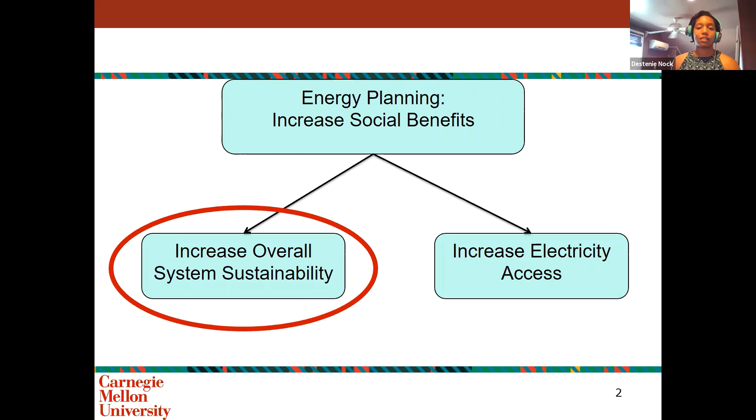So in the first part of this talk, we're going to be focused on increasing overall system sustainability. And this is really going to focus on the New England power system. That's where I started my research in power systems. And so if you have no idea where New England is, it's in the upper northeast quadrant of the United States. And it's made up of Maine, Vermont, Connecticut, New Hampshire, Massachusetts, Rhode Island, and yeah, that's all of them.

And they have a lot of energy questions that they are going through. So they were retiring about 5.5 gigawatts of coal and oil capacity, and 3.3 gigawatts of nuclear was at risk for retirement. So the main question that we were asking in this analysis was, which combination of power plants is going to be the most sustainable in terms of reaching their goals?

So if I asked you, what's more sustainable, coal or wind? A lot of people would just respond immediately with wind. And the same thing goes for natural gas versus solar. Often in the audience, a lot of people will respond with solar.

But if I was to ask you, what's more sustainable, a grid that's 50% natural gas and 50% wind versus a grid that's 50% natural gas and 50% solar, there would be more difficulty in understanding that. You need to understand your definition of sustainability, and you also need to understand your resources and how much energy each generator will contribute. So that makes a great motivation for a sustainability model.

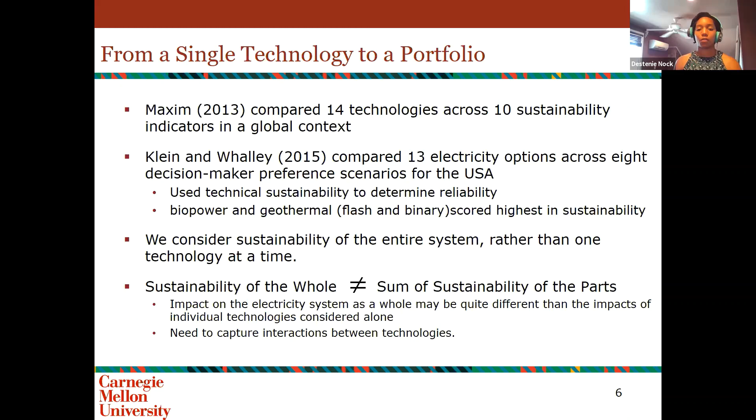But one of the downfalls of these analyses is that no single technology will ever be used to run the entire power system due to security concerns and resource availability concerns. So the main thought behind this was that the sustainability of the whole power system is not necessarily equal to the sum of the sustainability of the parts.

So to answer this research question, we based our analysis on the resource adequacy problem: ensuring that enough generation capacity satisfies demand, given the large-scale commercial technologies in the New England sector at the utility scale. New England is really dominated by natural gas. It's about 44% of their grid. They have a lot of hydro and nuclear plants.

Wind and solar farms are becoming largely deployed, especially with offshore wind technology making its way into the US market. And then the peaks are satisfied with oil plants that often come online in the winter when the natural gas is largely being used by the heating sector.

So in our initial analysis, we abstracted from transmission constraints, which means that this is going to be a lower bound on generation capacity needs in the New England region because we are not going to account for things like congestion, for example. So we're leaving that for future work.

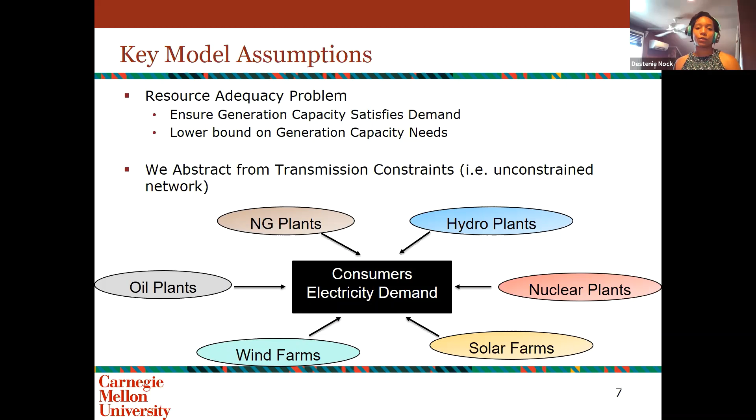So looking at the methodology we're using in this paper, the blue boxes are where we're defining the portfolios. First we start with gathering data on the hourly demand and wind speed information across the New England region, as well as solar radiation data and nuclear outage information. We input our initial generation capacity levels. We feed this information into an electricity model.

Then once we run the electricity model, which I'll explain more on the next slide, we determine if that generation portfolio is reliable, meaning can it meet the demand that we have set based on historical demand constraints for every hour over a 5-year time period. If it's not deemed reliable, we have to add capacity and then rerun it through our electricity model until we reach a reliable portfolio.

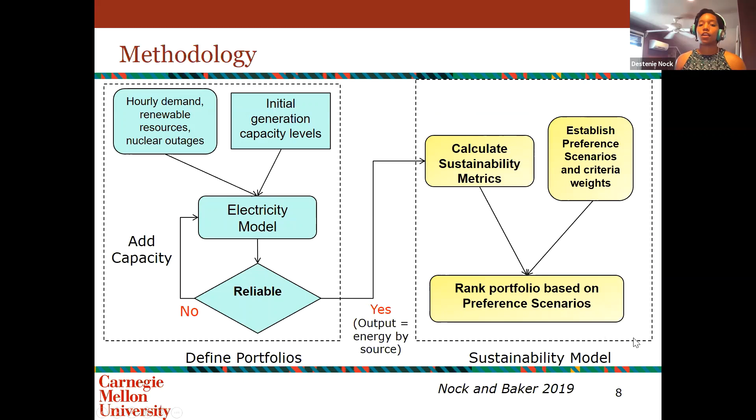And once we reach a reliable portfolio, we output the energy by source, and that feeds into our sustainability metric calculation. We have established preference scenarios, taken from the literature to represent our different decision makers, and then we rank those portfolios based on the different preference scenarios. So the blue boxes are where we're defining our portfolios, or the mixes of energy technologies, and the yellow is where we are actually evaluating the sustainability of these different portfolios.

So this is our electricity model. It's a merit order dispatch model based on historical prices in the New England region. We start at time t with our hourly demand, abbreviated HD. And we dispatch nuclear, because often it's negative in the New England region. We then dispatch solar and onshore wind, followed by offshore wind. If there's still hourly demand left, we'll split between natural gas and hydro.

And then we have to check if the pipeline is maxed out. In the New England region, natural gas has to go to the heating sector first. So if the pipeline is maxed out, then we believe that we are in winter due to the heating demand constraints, and we'll dispatch oil followed by hydro, due to needing to keep the river level higher so that we don't have a large amount of fish impacts. If the pipeline's not maxed out, we'll dispatch hydro first, followed by natural gas, followed by oil.

And if after we run through all of our technologies in the model we still have hourly demand left, then we say that we need capacity and that portfolio is not able to be tested any further in our study. And if we don't have any hourly demand left, we keep running this portfolio through our 5-year simulation for every hour of the year.

So, Destenie, it looks like you have a question. Okay, I can't see any questions, by the way. I will read it for you. Why are nuclear and onshore wind dispatched first? I think that's a good question there.

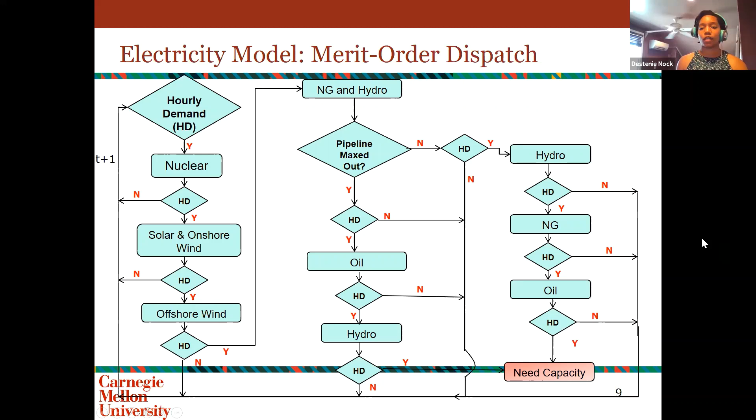Thank you. So there's some policy decisions that have been made in the New England area to help prioritize where they want the energy. Yeah, so right now solar and onshore wind are low enough that they are seen as a negative load or a must take in the New England region. So if they were actually competing in the competitive market, then we would need to capture how the prices would change over time. Thank you.

Okay. So the outputs from the model can be seen here. In the solid bars, we have our capacity in gigawatts, and the fuzzy bars would be the output of the dispatch simulation model, showing energy contribution by percentage. Green represents offshore wind, yellow is solar, the purple at the bottom is really small because most of the onshore wind in the New England region is in Maine, but not in Massachusetts, for example. The blue is hydro, the gray is oil, and the red is nuclear.

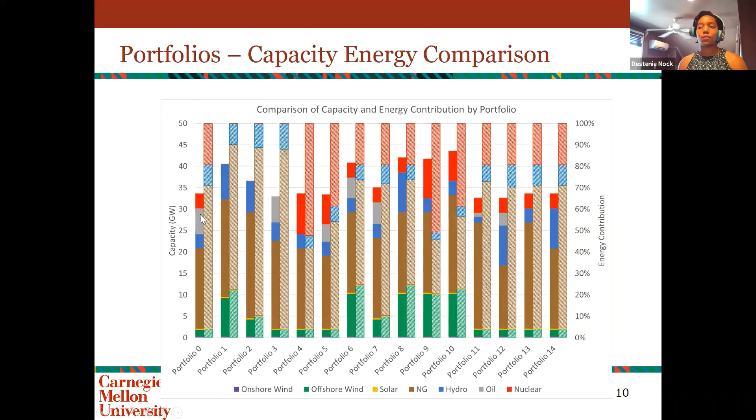So some of the things that we were focusing on with these portfolios is what's the role of nuclear in terms of sustainability. In portfolios 1 through 3, we have completely eliminated nuclear. In portfolios 4 and 5, we have assumed that maybe in the future nuclear would become favorable again in the New England region. We also have a lot of portfolios where we've kept the base level of nuclear, assuming that they keep their current capacity and don't make too many changes.

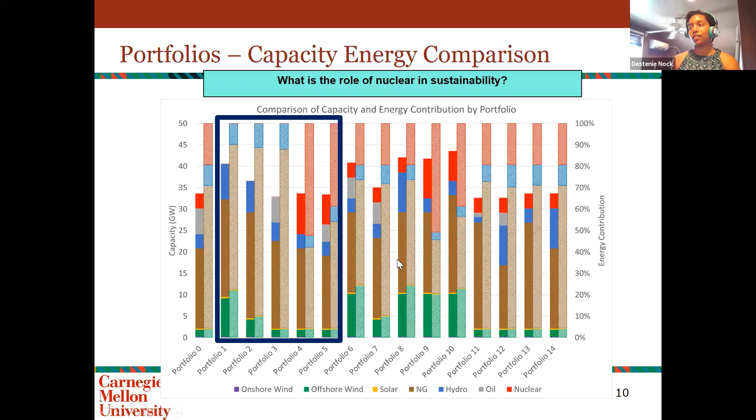We also asked the question of which generation should we use to support high offshore wind penetration. You can see in portfolios 6 through 10, we have really high levels of offshore wind in the New England region, about 10,000 megawatts. And we have been supporting that with different mixes of natural gas, hydro, and oil capacity.

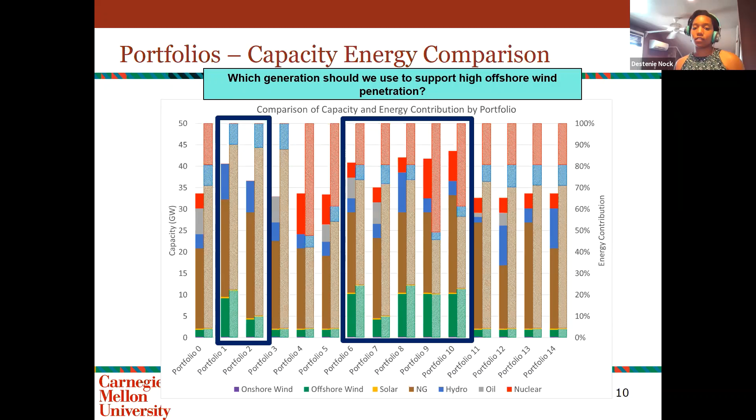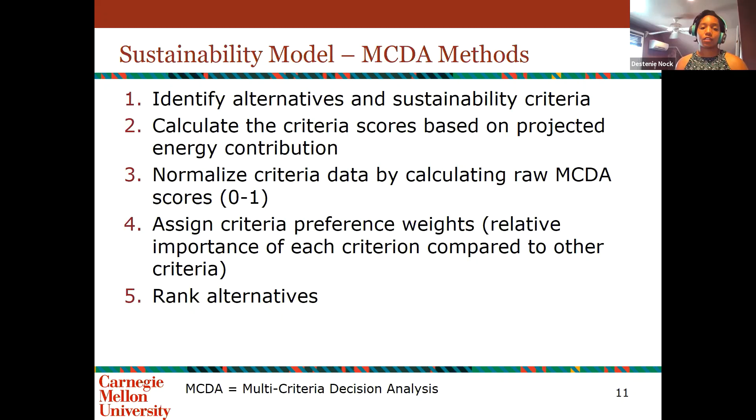Our sustainability model is based on the multi-criteria decision analysis framework, or MCDA. Step 1 is to identify different alternatives, which would be the different portfolios in our analysis, and also to identify sustainability criteria, which I will tell you on the next slide. Then in step 2, we calculate the criteria scores based on the projected energy contribution from our energy model. We normalize those scores between 0 and 1, with 1 being the best and 0 being the worst, so we can compare across different criteria. We'll assign criteria preference weights, which indicate the relative weight of importance of each criterion compared to the others. And then in step 5, we rank the alternatives.

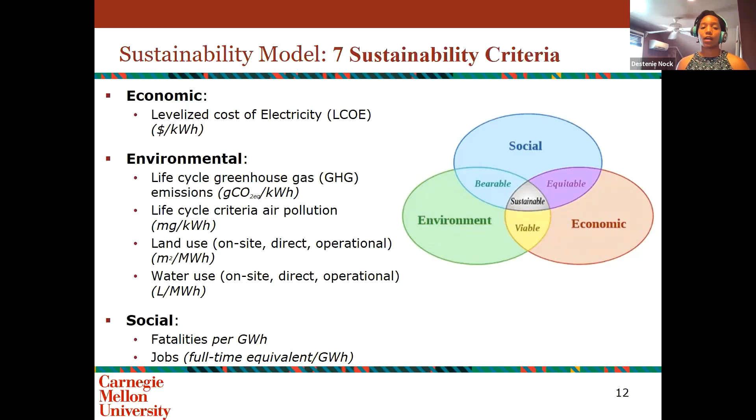In the sustainability model, we considered 7 sustainability criteria. The first is economic, with the levelized cost of electricity. We also included environmental concerns like life cycle greenhouse gas emissions, life cycle air pollutants, land use, and water use. And on the social side, we included expected fatalities per gigawatt hour, and jobs as full-time equivalent per gigawatt hour.

When determining the portfolio scores, we acknowledge that each power plant will have a fixed impact for sustainability and a variable impact. By fixed impact, I mean the emissions that just come from building the power plant. For example, with an oil or natural gas plant, there's a lot of concrete involved, which is very CO2 intensive over its lifetime. You also have CO2 emissions from drilling to get the oil, which would be more on the variable side. The variable side is any emissions that come from operating those power plants.

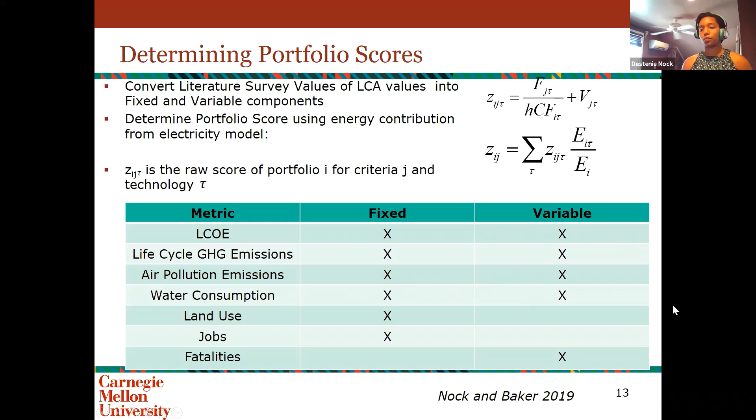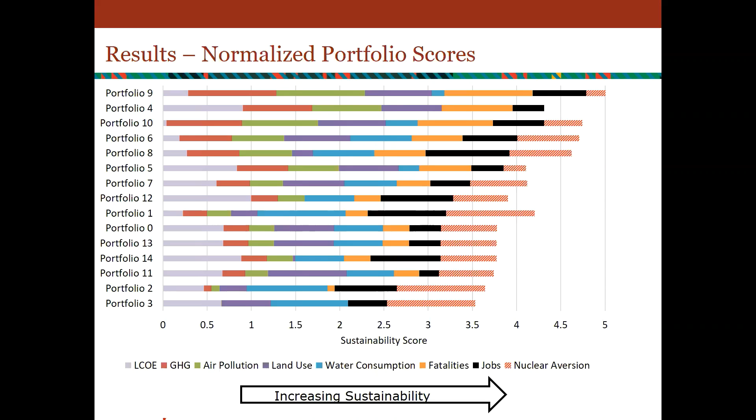Oh, I see a raised hand that's flashing on my screen. I think I can ask her to unmute and she can ask a question. Nina. Hi. Yeah, I was wondering if the goal is to have a low sustainability... The goal is what? Hard to hear you, Nina. Lower sustainability score. I'm just kind of confused because I would think you would want these bars to be lower, right? Or maybe I'm misinterpreting the graphic.

Right, so a longer bar is more sustainability. So for LCOE, lower is better. So it's the inverse of the bar. So if it has a sustainability score of 1, that means that it was the lowest cost portfolio in our analysis. And if you have portfolio 3... Great, thank you. You're ranking it in terms of right here. So portfolio 3 would be the quote unquote best.

Yeah, so actually it's portfolio 12 because it jumps right up to 1, right? So it has a score of 1, meaning that it's the best portfolio in terms of cost for our entire analysis, and that means that this is going to have the lowest cost. Portfolio 10 has the lowest bar, meaning that it has the highest cost. So it's inversely proportional. The only one that's directly proportional would be jobs, because more is better, right? So 1 for jobs means that it has the most jobs, and a 0 for jobs means that it has the least jobs.

So with this graphic, we noticed some trends. We see that portfolios 6 through 10 are all the high offshore wind portfolios, and those are all in the upper quadrant of our bar chart. And portfolio 4, the number 2 portfolio when you don't include nuclear aversion, is our high nuclear portfolio case. It scores well because of the low greenhouse gas emissions and low air pollutant emissions from nuclear. Also, nuclear has a very high energy density, so you can get more production out of it for less land use compared to other technologies.

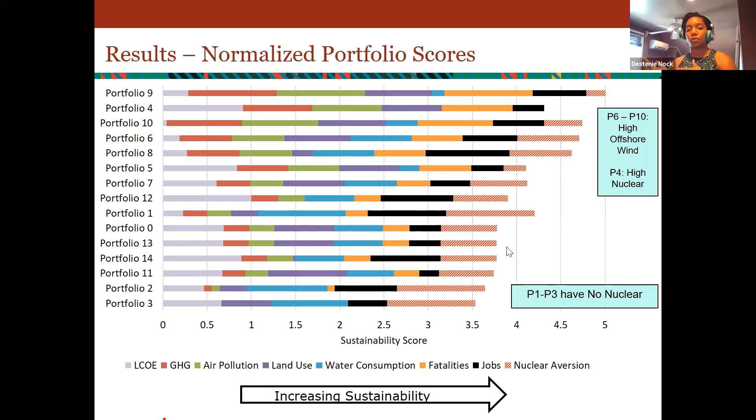And then if we include nuclear aversion, the only portfolio that we found to outrank portfolio 9... So the difference between portfolio 6 and portfolio 9 is that 9 has a higher amount of nuclear. It's kept on its base capacity and added a couple of nuclear power plants. So the only time portfolio 6 outranks portfolio 9 is when the nuclear capital cost exceeds $7,680 per kilowatt, or the natural gas air pollution emissions fall below 505 milligrams per kilowatt hour. So if, for example, they had some carbon capture technology attached to these natural gas plants, then portfolio 6 would continue to rise in the ranking.

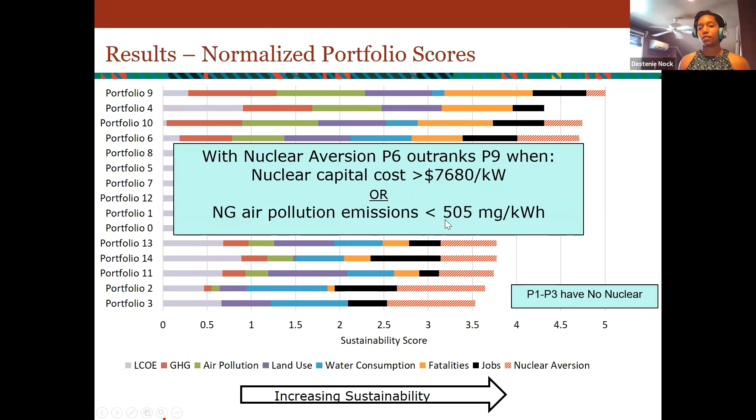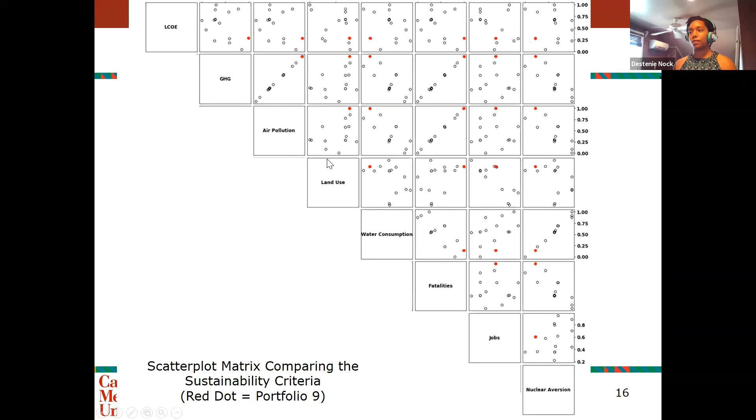The way that you read this is you look at the intersection. So if you wanted to know how the portfolio is ranked when you only considered air pollution and land use, you would go to the intersection of these two and you would look at this box. Same thing for air pollution and water consumption. And then you would look at the intersecting box there. The red highlighted boxes indicate a strong positive correlation between our metrics, which indicates that we could actually reduce the number of criteria that we're considering or presenting to decision makers.

So let's say, for example, we had a decision maker that really cared about reducing greenhouse gas emissions, and another decision maker that really cared about reducing fatalities. If you actually talk to them only in the metrics that they truly care about, you would end up seeing the same most highly ranked sustainability portfolio in both cases. So it actually just kind of helps you think about how you can talk to people. The same thing goes for nuclear consumption, nuclear aversion, and water consumption.

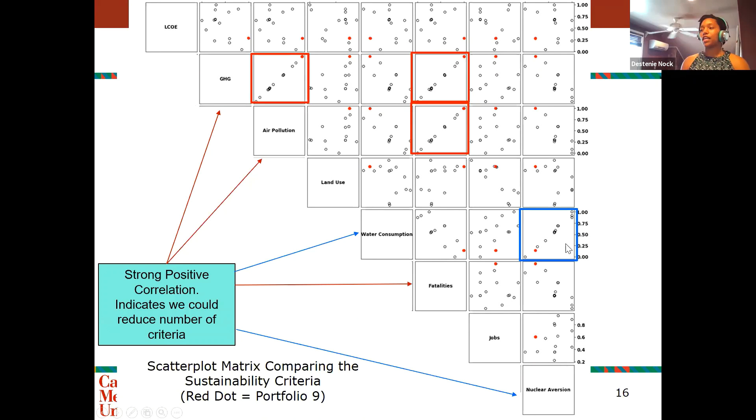And then if you look at the pink box, when we have a Pareto frontier or a non-positive correlation, we understand the trade-offs between portfolios. So if you're looking at the intersection of air pollution and jobs, where my mouse is, then this trade-off between the red dot and this non-highlighted dot would let you know, if you move from portfolio 9 to, let's say, portfolio 5, how much are your air pollution emissions increasing to increase the number of jobs? Is it going to be 10%, 50%, for how much job gain, 20%, 30%, et cetera?

And so this helps decision makers understand what they're winning and losing on when they move between these two different portfolios. So just understanding what's the difference between the best and the second best and the third best.

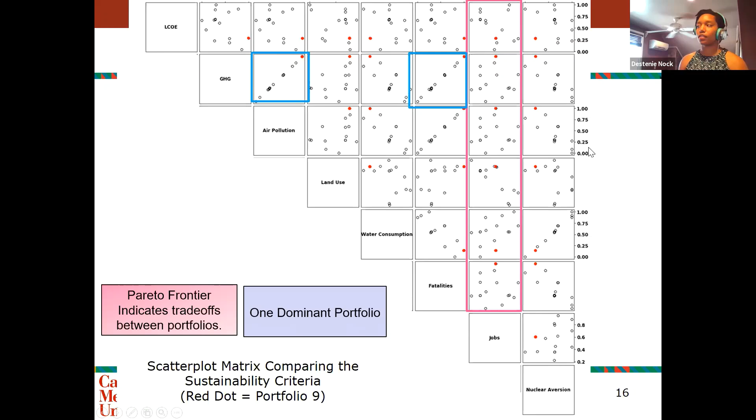So when we include this in our analysis, we find that we can actually eliminate a lot of our portfolios. In total, I have presented about 15 portfolios here to you. But in actuality, we tested about 35 to 50 different electricity system combinations in our analysis. When we included the stakeholder preference scenarios, we found that we had a non-dominated set of 7 portfolios. So when you include everybody and what they care about, these are the best ranked ones. And here we see that portfolios 9 and 4 are scoring really well in the majority of preference scenarios, except for the economy, and that's because of the high cost of offshore wind and nuclear.

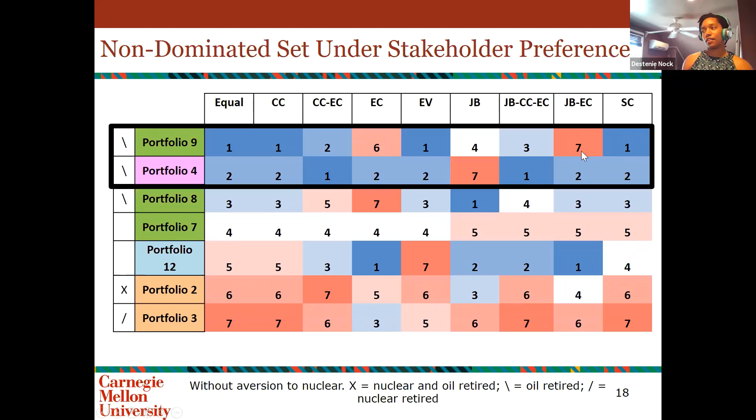And then we looked at which, if any, of the portfolios would become non-dominated. The only one that would jump into our non-dominated set is portfolio 1, which is a portfolio where we completely retired nuclear. And it becomes non-dominated upon just a 7% increase in nuclear capital costs, because that drives a lot of these portfolios down in terms of the economic preference scenario.

And then portfolio 6 becomes non-dominated if you increase the nuclear costs by 100%. So if they became really expensive, like we saw in Georgia and South Carolina a couple years ago. And so then we can ask ourselves, well, we have those equal weight portfolios, but how would things change if we included aversion to nuclear in our equal weight preference scenario?

So along the x-axis, you have the nuclear aversion scaling coefficient. At the beginning in our initial equal weight, we had 0% of caring, and then you have 20% of what you care about is nuclear aversion, and so on. The green lines are representing our high offshore wind cases. The orange lines are representing the cases where we've completely retired nuclear, and the pink line is where we have increased nuclear capacity.

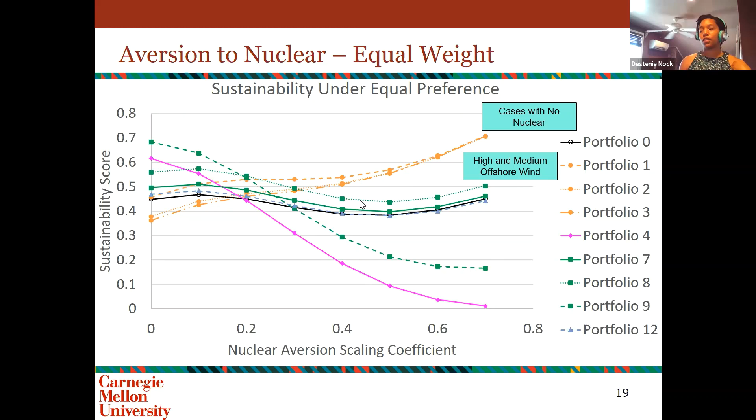So then actually choosing our 3rd best portfolio would provide you with some robustness to the nuclear aversion criteria. Oops, I kind of said that. And so I guess I can pause here to ask if there's any more questions about the New England side. And then I'm going to move into my work on increasing electricity access, which is based in developing countries.

Okay. Can I just ask, I want to ask a devil's advocate question. Just help me understand, because nuclear is like a really, people love it or hate it, that kind of thing. Tell me, what's the reason and rationale behind saying that nuclear is not sustainable? Because of, I think it was the impact, or what's needed to build a nuclear plant, or can you just explain that a little bit?

I think the main place where nuclear doesn't do well is in the cost side, because the costs are so expensive. So economically, it's ranked really low in terms of sustainability. So in South Carolina and Georgia, they were building nuclear plants, and last I checked, they were like a couple $2 billion over their budget. And so it's just really expensive to try to build these nuclear power plants, because you have to also make sure that you are taking into account your radioactive concerns, your safety concerns.

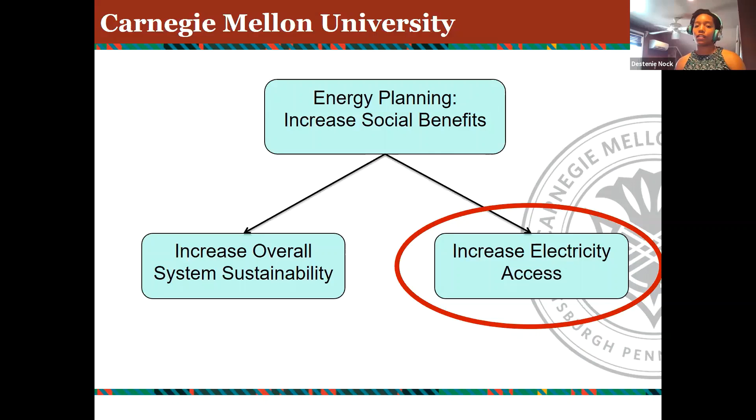Great, thank you. Okay, so now I'm going to talk about the work that I've done in Sub-Saharan Africa, where we're focused on increasing electricity access. So this work is published in Applied Energy, and we are calling it Changing the Policy Paradigm, a Benefit Maximization Approach to Electricity Planning in Developing Countries. And in this paper, we propose a method for incorporating stakeholder preferences towards equality into an electricity planning framework.

The motivation behind this is the United Nations 2030 target for universal access to modern energy. And the main question we were asking in this research is, what should universal access look like, and what does equitable universal access look like?

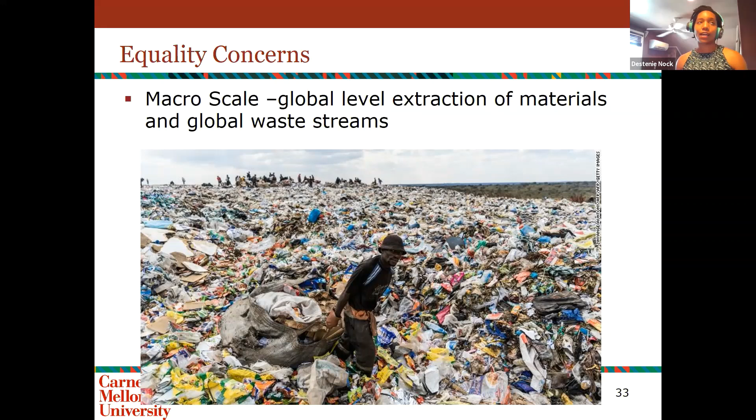So when I think about electricity access, I actually think about it in terms of 5 facets. First, we have the quantity or the amount of electrical supply you receive. This means how many appliances can you connect in your house if you have an electricity connection. The affordability is what percentage of your income you spend on electricity services. Reliability is the number of disruptions that you receive to your electricity supply. So in the US, you might experience an outage once a year or a couple times a year. But in developing countries, we're really thinking about the number of hours per day or per week.

And then the quality is the voltage level. So that's going to be when you plug in your computer, is the electricity voltage level going to actually ruin your appliances? So as an example, when I was in Ghana, my phone battery would always overheat. And I'm sure some of you have experienced maybe your laptop overheating. And sometimes that's an indication that the voltage level is not properly rated for the battery in your appliance.

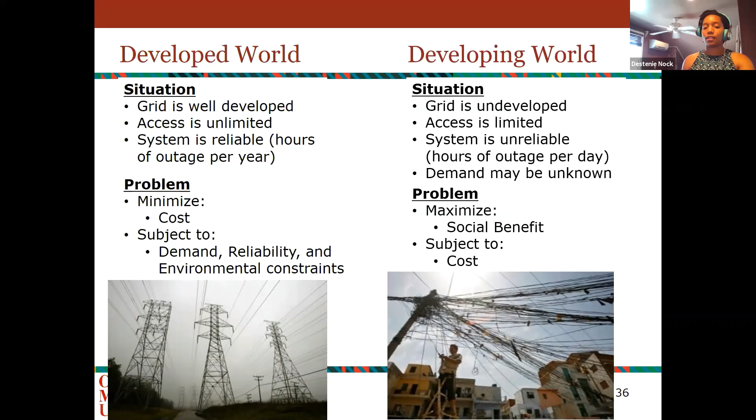So when we're thinking about turning these concerns into a model, in the developed world, the situation is often that the grid is well developed, access is unlimited, and the system is considered reliable. So then the optimization problem becomes to minimize the cost subject to demand, reliability, and environmental constraints. But in the developing world, often the grid is undeveloped and access is very limited, meaning that the system is also unreliable, with possibly hours of outage per day, and the demand could also be unknown because people typically haven't had access to electricity. So then the problem becomes to maximize the social benefits subject to a cost, because often there are a lot of donors helping to build this system.

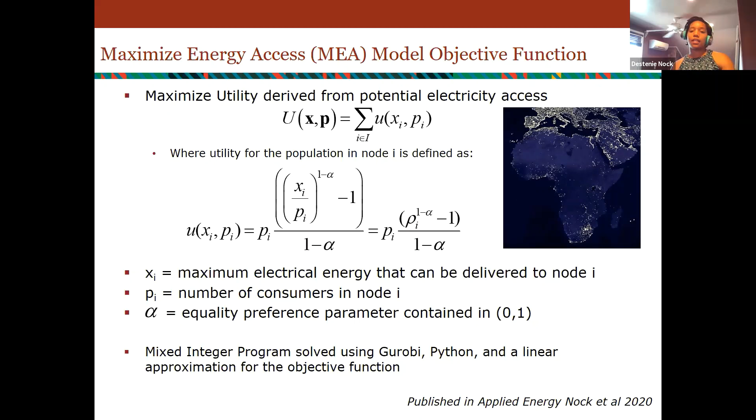This is a flow of information diagram to kind of help you conceptualize how the model works. The inputs include the social planner's preference for equity, budget constraints, and geography constraints, as well as population, generation costs, and transmission costs. Inside of the model, so inside of this dotted line, the model will determine where they build power plants, so the generation investment, and where they build transmission lines.

This feeds into a calculation of how much electricity can flow around this system, and that goes into this power flow calculation. Based on the power flow calculation, the model will determine how much electricity to leave in each location, so the electrical consumption. And these will feed into the costs in the system, which runs up to our main constraint, our budget constraint. And the green circle is representing our objective function, which is the social welfare or the utility that the stakeholder gets for bringing electricity access to their country.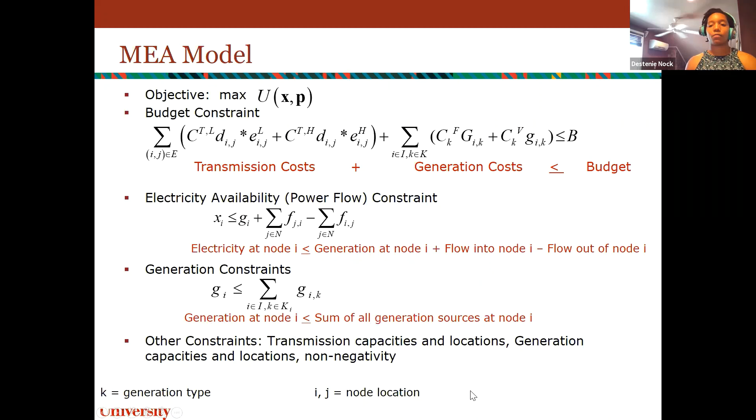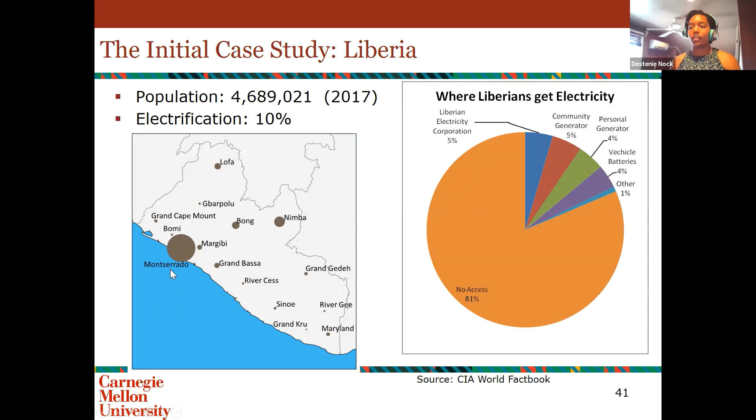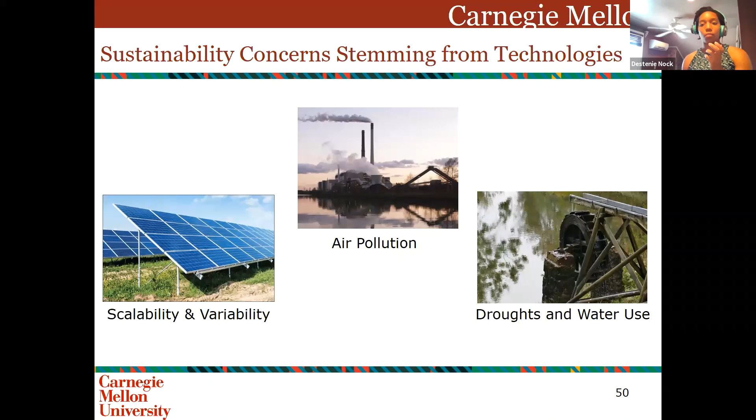The three sustainability concerns that we were thinking about were droughts and water use, air pollution, and scalability and variability. And we were looking mostly at greenhouse gas emissions and water consumption for the 4 technologies that we included. These are metrics that we got from the literature. These are averages, and currently we are working to expand this to include a wider range because we know that life cycle assessments vary widely by country. But when we looked at the averages, we saw some distinct sustainability trade-offs between different alphas and different budgets.

We have a question. Ooh, yeah. Ooh, sorry, finish your thought. Oh, okay.